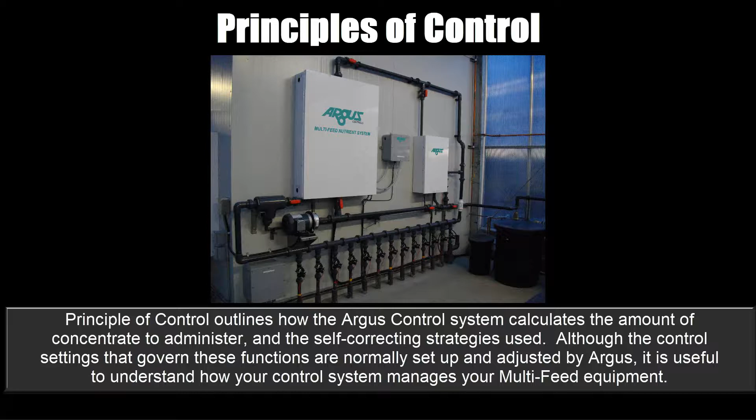Feed-forward control. Key concept: Using the system flow sensor, calibrated injectors, and the declared concentrate strengths, the Argus system predictively calculates how much concentrate to add to achieve the current target.

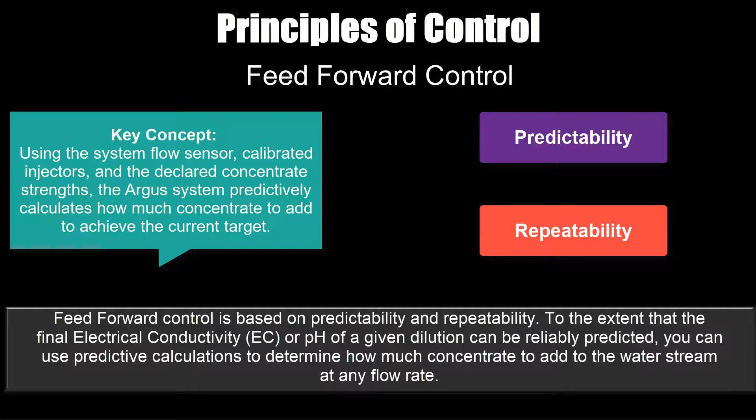Feed-forward control is based on predictability and repeatability. To the extent that the final electrical conductivity, EC, or pH of a given dilution can be reliably predicted, you can use predictive calculations to determine how much concentrate to add to the water stream at any flow rate.

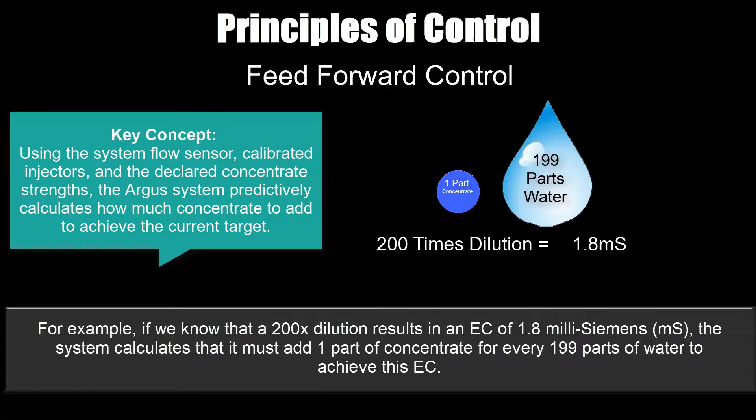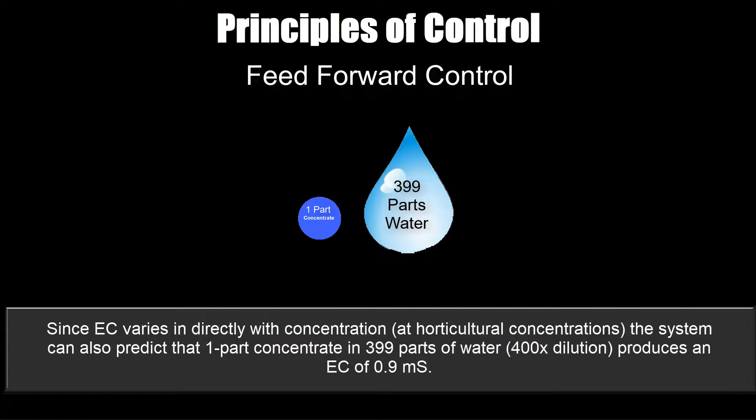For example, if we know that a 200 times dilution results in an EC of 1.8 millisiemens, the system calculates that it must add 1 part of concentrate for every 199 parts of water to achieve this EC. Since EC varies directly with concentration at horticultural concentrations, the system can also predict that 1 part concentrate in 399 parts of water, or 400 times dilution, produces an EC of 0.9 millisiemens.

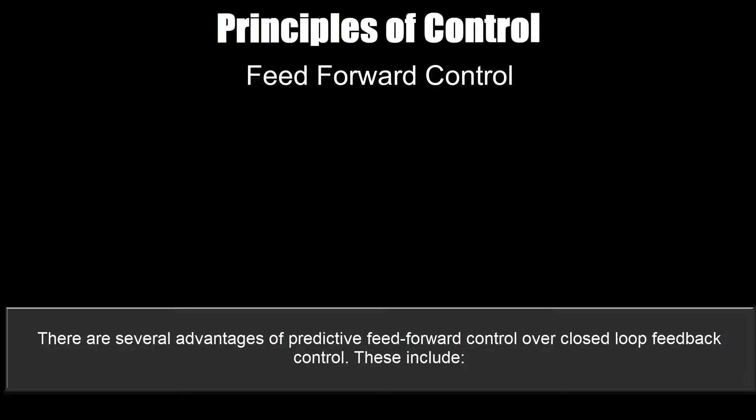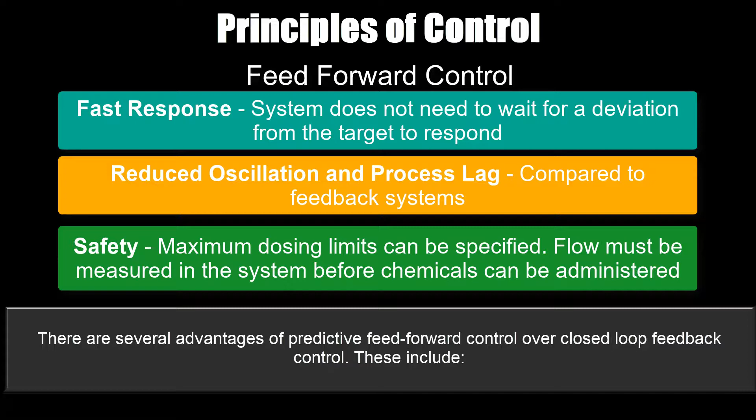There are several advantages of predictive feed-forward control over closed-loop feedback control. These include fast response - the system does not need to wait for a deviation from the target to respond; reduced oscillation and process lag compared to feedback systems; safety - maximum dosing limits can be specified; and flow must be measured in the system before chemicals can be administered.

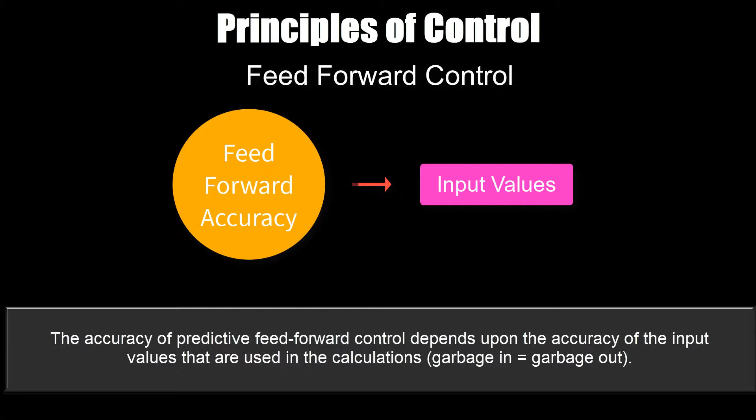The accuracy of predictive feed-forward control depends on the accuracy of the input values used in the calculations - garbage in equals garbage out. The Argus system calculates feed-forward output values using the following input information: the current irrigation system flow rate from the flow meter, the calibrated stock solution flow rate across the metering injection valves, and the declared strength of your stock solutions.

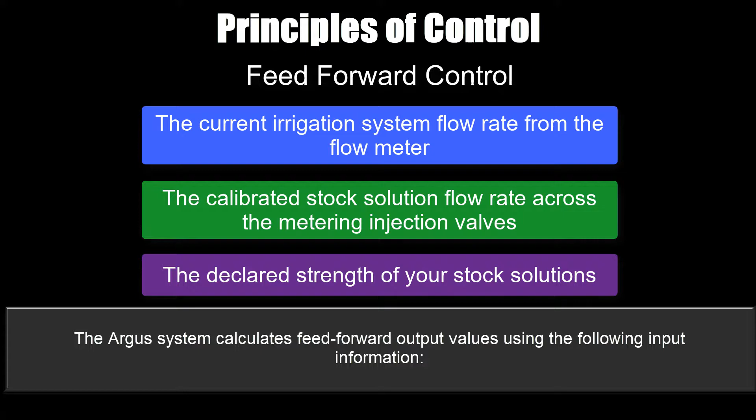If all these inputs are accurate, the control results are an accurately diluted feed. In practice, there are many sources of error that can cause the predictive calculations to be slightly off, even when great care is taken in calibrating the system.

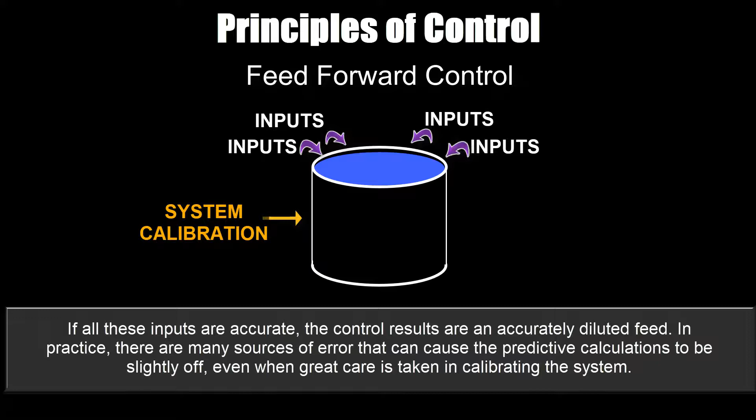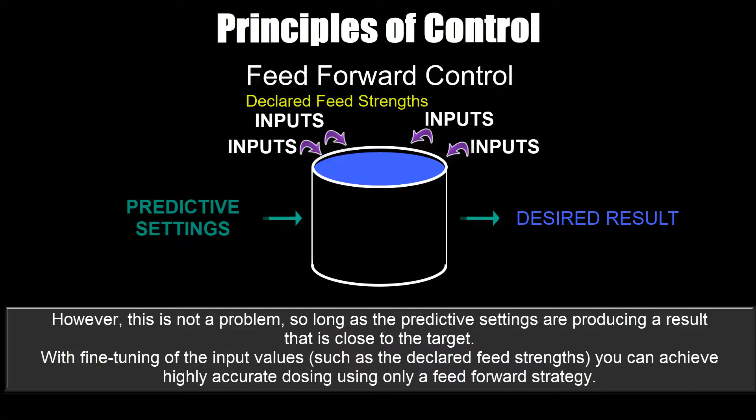However, this is not a problem so long as the predictive settings are producing a result that's close to the target. With fine-tuning of the input values, such as the declared feed strengths, you can achieve highly accurate dosing using only a feed-forward strategy. The Argus system provides methods for automatically adjusting small errors in the feed-forward output values by

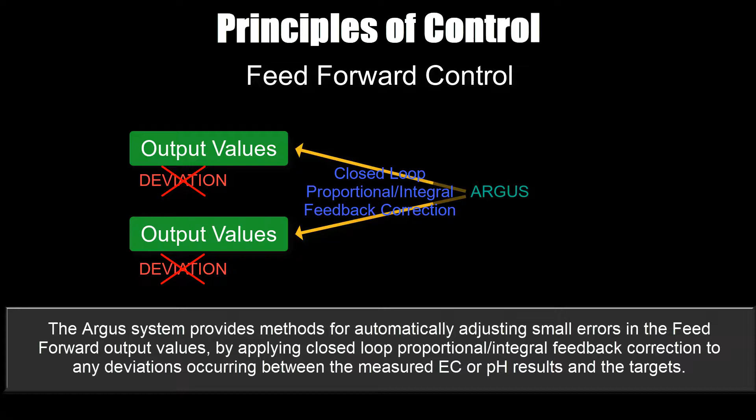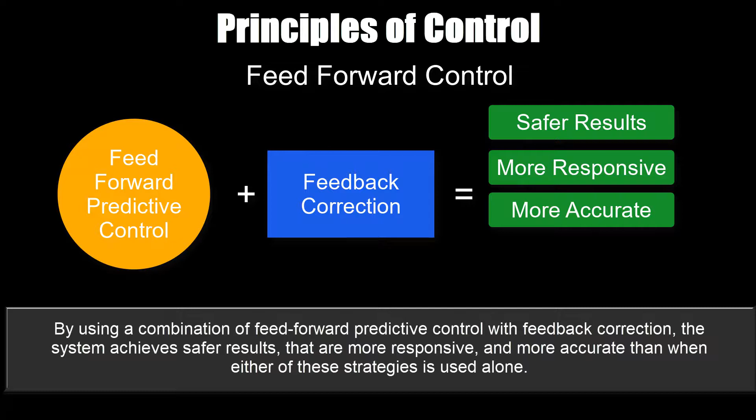applying closed-loop proportional, integral feedback correction to any deviations occurring between the measured EC or pH results and the targets. By using a combination of feed-forward predictive control with feedback correction, the system achieves safer results that are more responsive and more accurate than when either of these strategies is used alone.

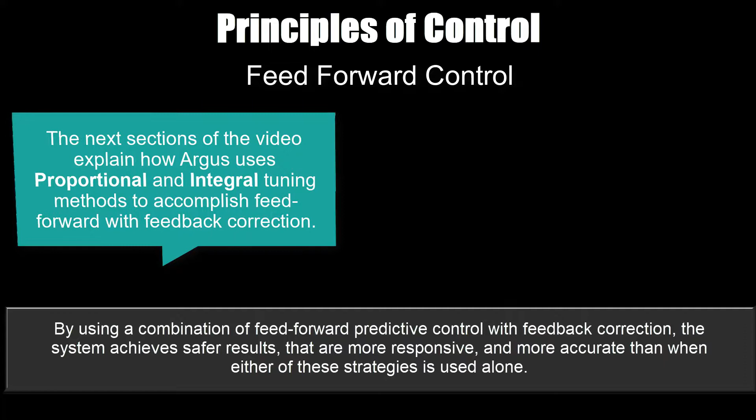The next sections of the video explain how Argus uses proportional and integral tuning methods to accomplish feed-forward with feedback correction. Proportional response in controlled systems. Key concept: A proportional response is varied directly with the instantaneous direction and magnitude of a measured deviation from the target. A proportional response calculation is commonly used in feedback-controlled systems.

With proportional control, an instantaneous output value is calculated in response to the degree to which a measured variable has deviated from the target. It's important to note that proportional control is not concerned with how long a deviation has occurred, only the size of the deviation. A small deviation produces a small output response, and a large deviation produces a larger output response.

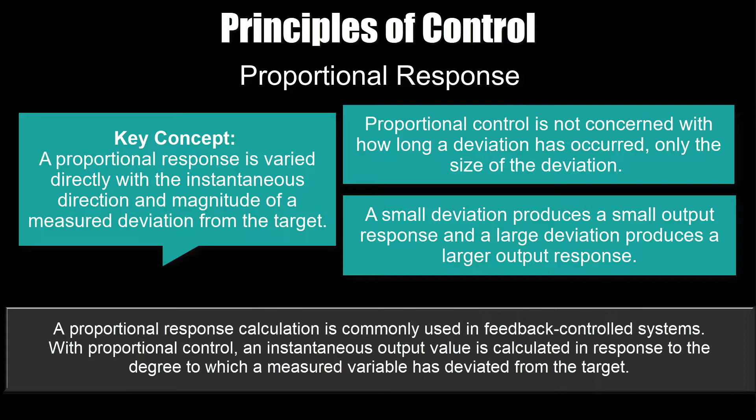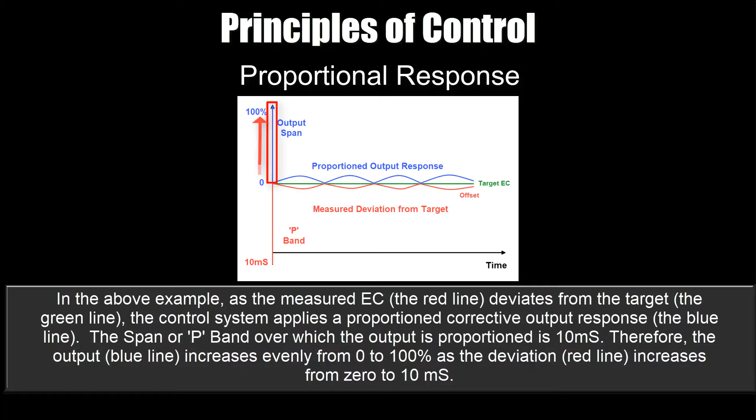In this example, as the measured EC, the red line, deviates from the target, the green line, the control system applies a proportional corrective output response, the blue line. The span, or P band, over which the output is proportioned is 10 millisiemens. Therefore, the output, or the blue line, increases evenly from 0 to 100% as the deviation, or the red line, increases from 0 to 10 millisiemens.

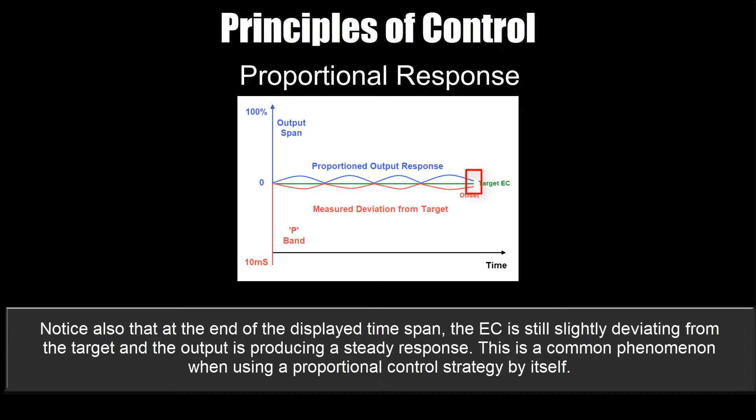Notice also that at the end of the displayed time span, the EC is still slightly deviating from the target and the output is producing a steady response. This is a common phenomenon when using a proportional control strategy by itself.

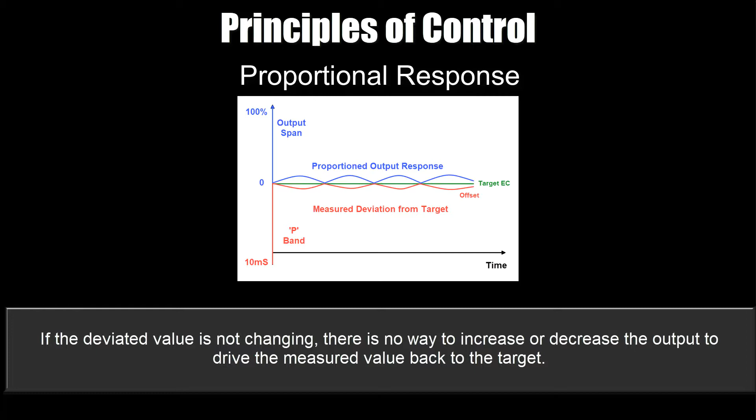The system has become balanced just below the target with a steady corrective output. Since the measured deviation is not increasing or decreasing, the output remains steady. Proportional control alone has no mechanism to correct for this residual error, it can only respond to it. If the deviated value is not changing, there is no way to increase or decrease the output to drive the measured value back to the target.

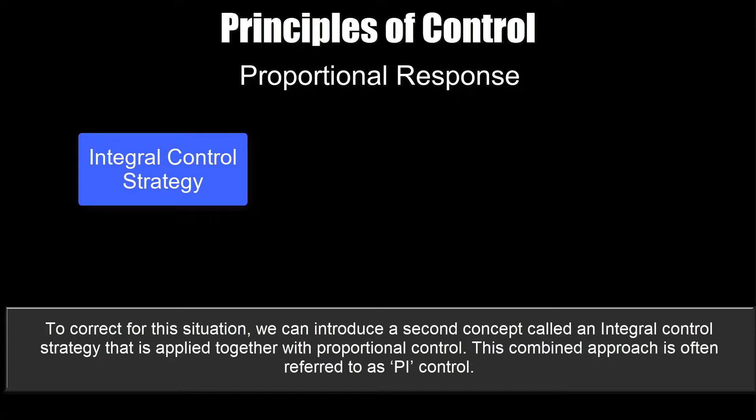To correct for this situation, we can introduce a second concept called an integral control strategy that is applied together with proportional control. This combined approach is often referred to as PI control.

Integral response in controlled systems.

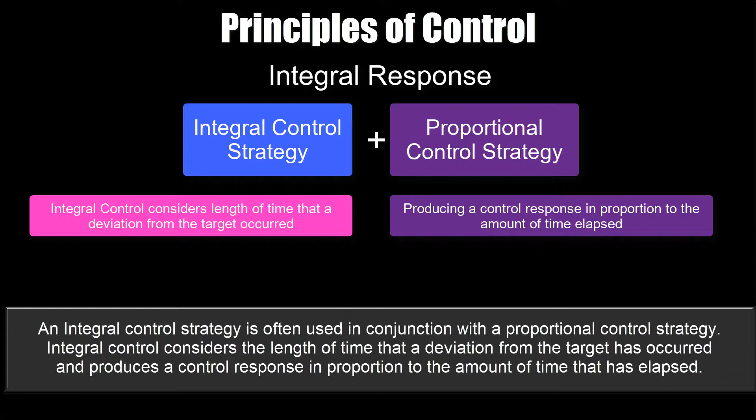Key concept: an integral response varies with the direction and the length of time of a measured deviation from its target. An integral control strategy is often used in conjunction with a proportional control strategy. Integral control considers the length of time that a deviation from the target has occurred and produces a control response in proportion to the amount of time that's elapsed.

An integral calculation is not concerned with the size of the deviation, only with the duration. The integral calculation does not care about the amount of the actual deviation.

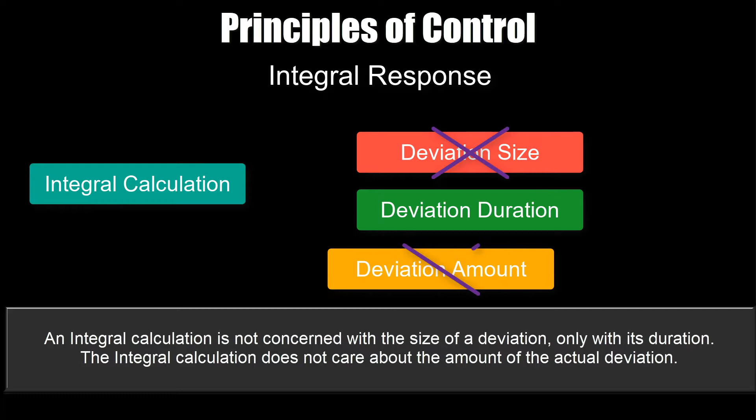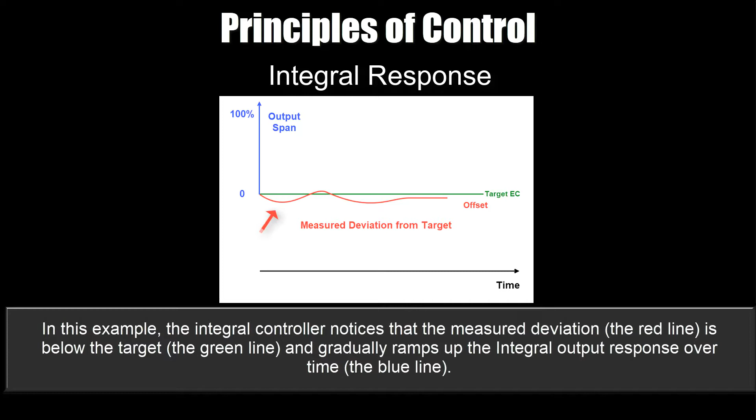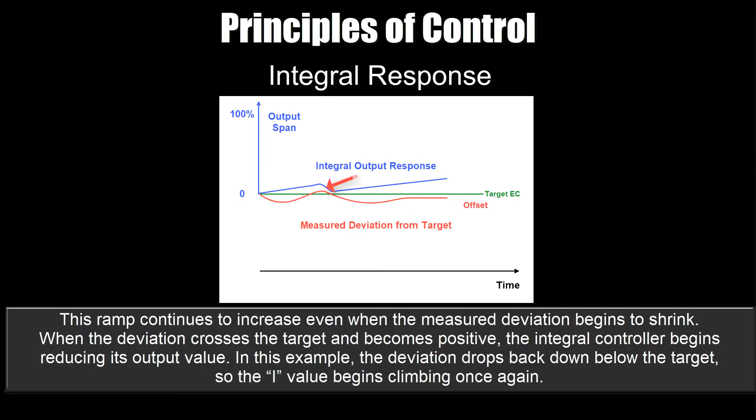In this example, the integral controller notices that the measured deviation, the red line, is below the target, the green line, and gradually ramps up the integral output response over time, the blue line. This ramp continues to increase even when the measured deviation begins to shrink. When the deviation crosses the target and becomes positive, the integral controller begins reducing its output value.

In this example, the deviation drops back down below the target, so the I value begins climbing once again. The desired output value continues to climb at a steady rate even though the deviation amount is less than the first interval. Eventually, if the deviation is not returned to zero, the output reaches its maximum output value.

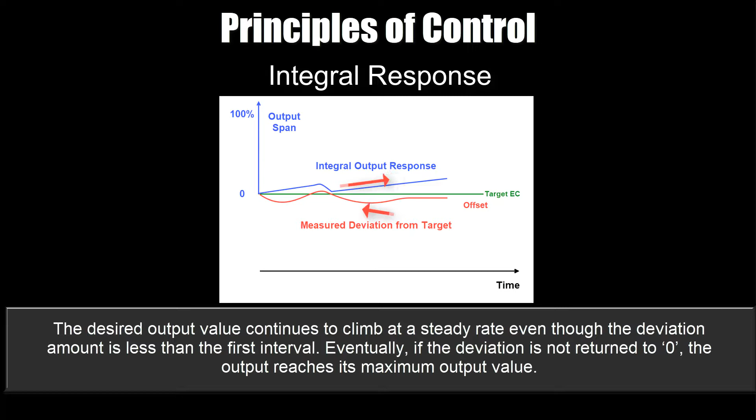While integral control can be used by itself in some circumstances, it's usually used as a means of correcting for the offset phenomenon that commonly occurs when using proportional control. Should an offset or steady state condition occur with proportional control, the integral timer increases the output over time to correct it. Whenever integral control is used in conjunction with a proportional control strategy, it's referred to as PI control, proportional integral.

When properly tuned, a PI strategy can react quite well to sudden changes, P, and still achieve longer-term average target values, I.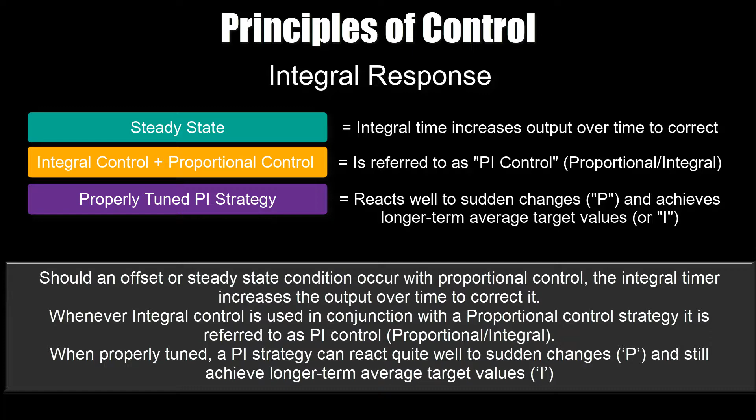Using a combination of feed-forward and proportional integral response in control systems.

Argus often uses a combination of feed-forward and proportional integral, PI, feedback control strategies. This integrated approach helps to overcome the inherent problems possible if either strategy is used alone. Open-loop strategies that use feed-forward calculations are only as accurate as their calibrated information.

Even when great care is taken with the settings, there's likely to be a slight difference between the target values and the measured results, or the readings. Since feed-forward calculations do not contain any self-correcting capabilities, offsets tend to be steady.

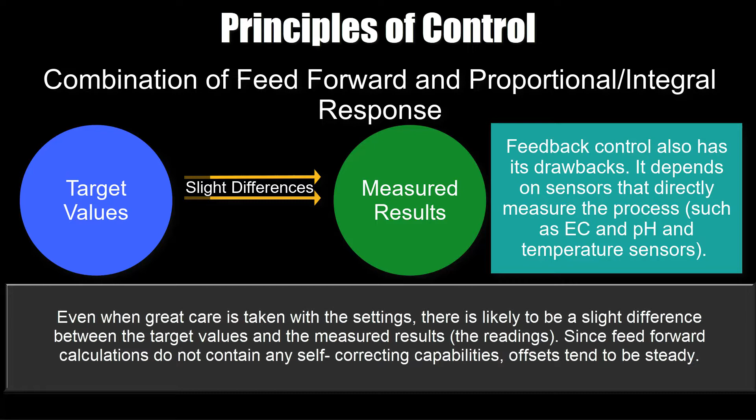Feedback control also has its drawbacks. It depends on the sensors that directly measure the process, such as EC, pH, and temperature sensors. Throughout the controlled system, there are several process lags, making it impossible to instantly react to deviations between the targets and the readings. These lags mean that the controlling environment equipment is always a bit behind the actual events when it applies its corrections. It's chasing a moving target.

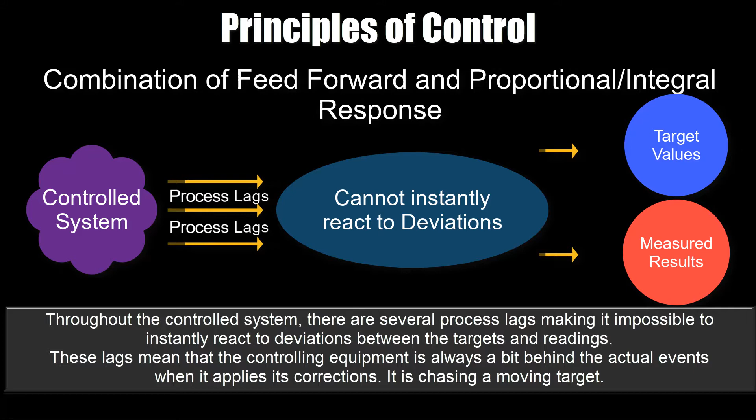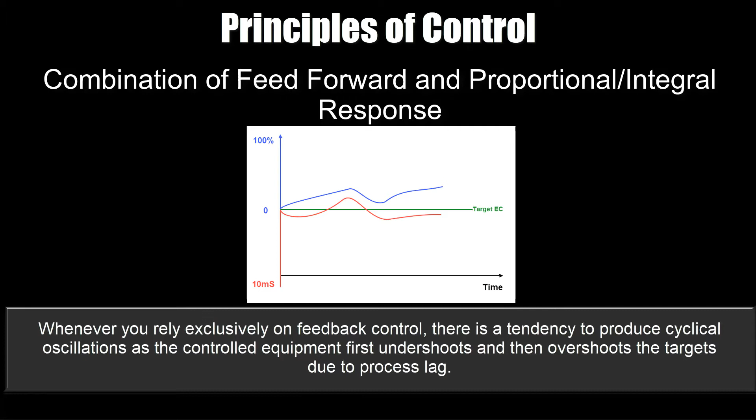Whenever you rely exclusively on feedback control, there's a tendency to produce cyclical oscillations as the controlled equipment first undershoots and then overshoots the targets due to process lag. To some extent, these oscillations can be tuned out by using proportional and integral feedback control settings that match the process, but this can be a very difficult proposition and may require frequent retuning as external conditions change. Not very satisfactory for everyday control.

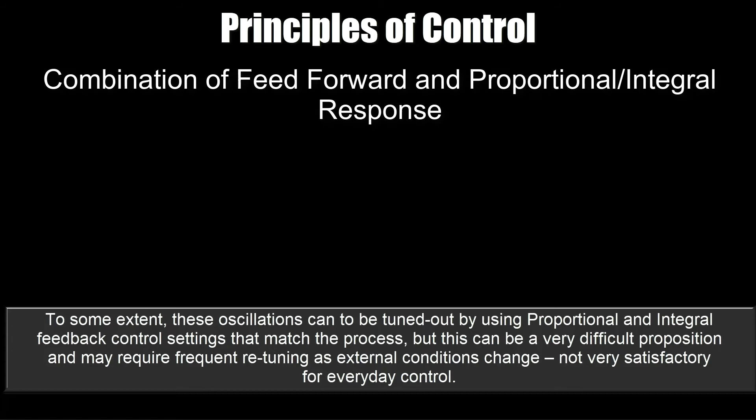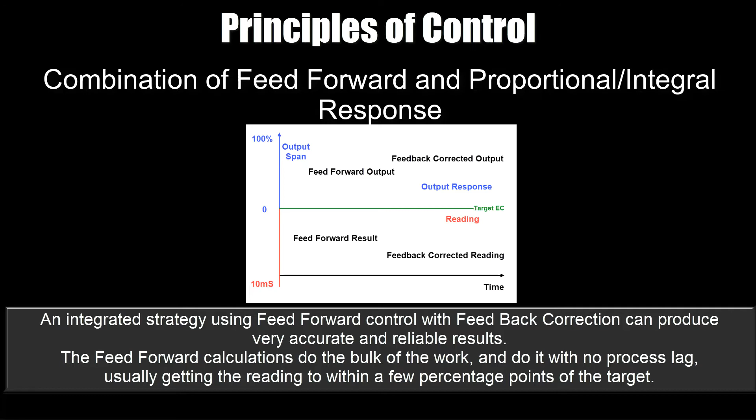An integrated strategy using feed-forward control with feedback correction can produce very accurate and reliable results. The feed-forward calculations do the bulk of the work and do it with no process lag, usually getting the reading to within a few percentage points of the target. The feedback correction program measures the residual deviations, makes the feedback corrections, and adjusts the control system response to drive the reading closer to the target.

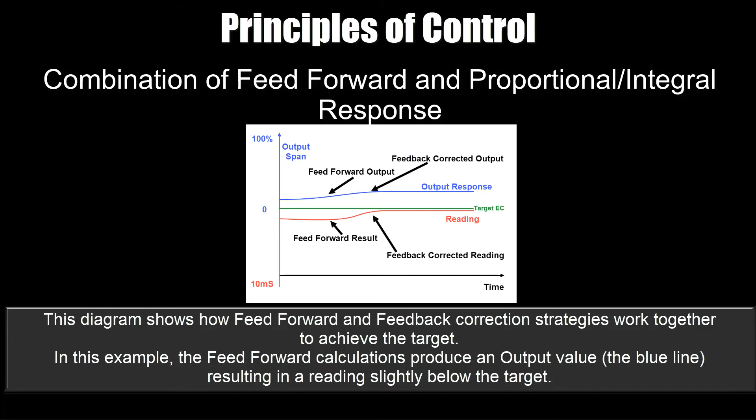This diagram shows how feed-forward and feedback correction strategies work together to achieve the target. The feed-forward calculations produce an output value, the blue line, resulting in a reading slightly below the target. This small offset is then automatically corrected by the feedback control settings. It increases the output response, or the blue line, until the reading matches the target.